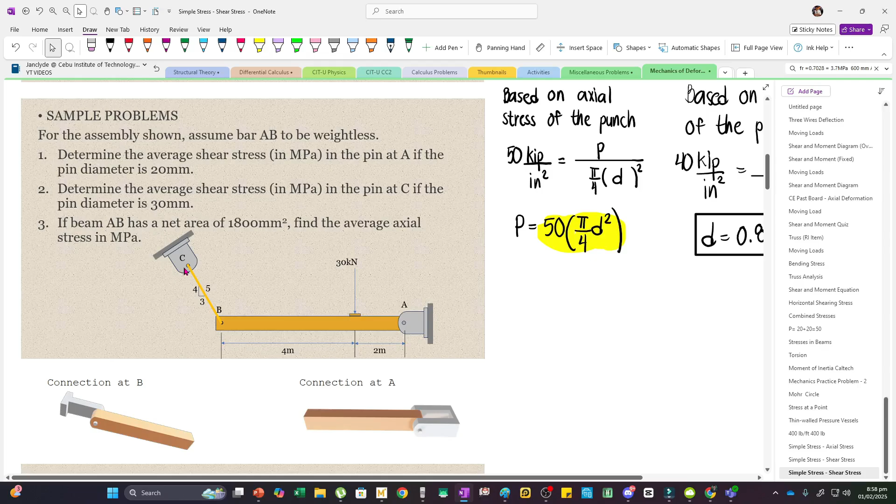Now ito yung connections natin. Merong pin at A saka pin at C. But hindi pa natin alam if single shear or double shear. Buti na lang, binigay yung section view ng connection at A saka connection at B. So now, solve muna natin yung reactions.

By the way, itong problems na to, meron tong choices. Tapos yung choices, medyo tricky. Merong mga trap na choices. So for example, dito sa number 1, tinanong yung shear stress ng pin at A. So naka-double shear. Now kapag hindi mo na-divide by 2, lumabas din siya sa choices. So kaya you have to be careful of that.

So again, let's make a cutting plane dito. So maglalabasan yung tensile force ng BC. And then sa point A naman, meron tayong dalawang reactions. This is AY and then this is AX.

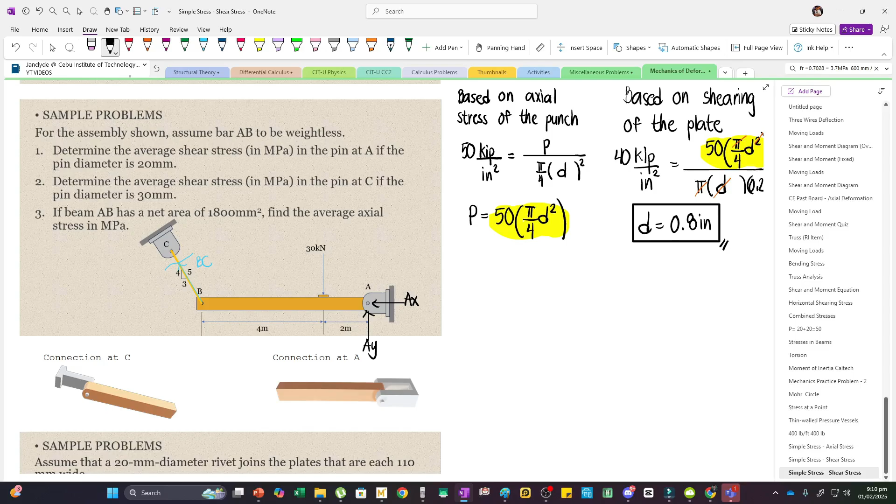Ayan. So itong BC, meron siyang components, horizontal and vertical components. So ito yung BC, BCX, which is essentially BC times the horizontal distance divided by the hypotenuse. Ayan, to the left. And then meron din siyang upward na component. So this is BC multiplied by the vertical distance divided by the hypotenuse.

This is 5. So, depende na lang sa'yo ano yung preference mo kung saan ka magsisimula. Now, I will just take moments about point B equal to 0. So, ditong banda, yung force BC, it will be eliminated since wala siyang rotation na makukos about point B since ito yung originating point niya.

So, ito lang. Yung AY, magkukos siya ng counterclockwise rotation about point B. So, minus AY. And then, our moment arm is 4 plus 2. This is 6. Then, itong 30 kN load, it will cause a clockwise rotation about point B. So, plus pala. 30. And then, our moment arm is 4.

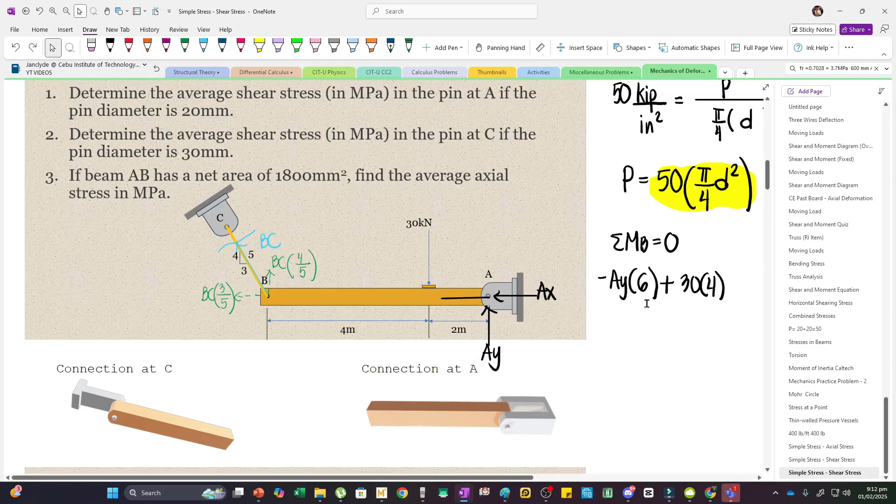Tapos, yung AX, line of action niya, tatama sa point B. So, wala siyang rotation na makukos. Wala kasi siyang moment arm. So, equate mo na lang yan agad to 0. And then, we can solve AY. So, negative 6AY, then plus 30 times 4 equals 0. Ayan. AY pala is 20.

Ayan. Now, since meron na tayong AY, we can sum up forces vertical. Summing up forces vertical, we have BC times 4 over 5, then minus 30 going downward, tapos plus AY, which is again 20. Equate to 0. BC is equal to 30 minus 20, multiplied by 5 over 4. I mean, this whole expression pala. Ayan. So, BC equals 12.5 tension.

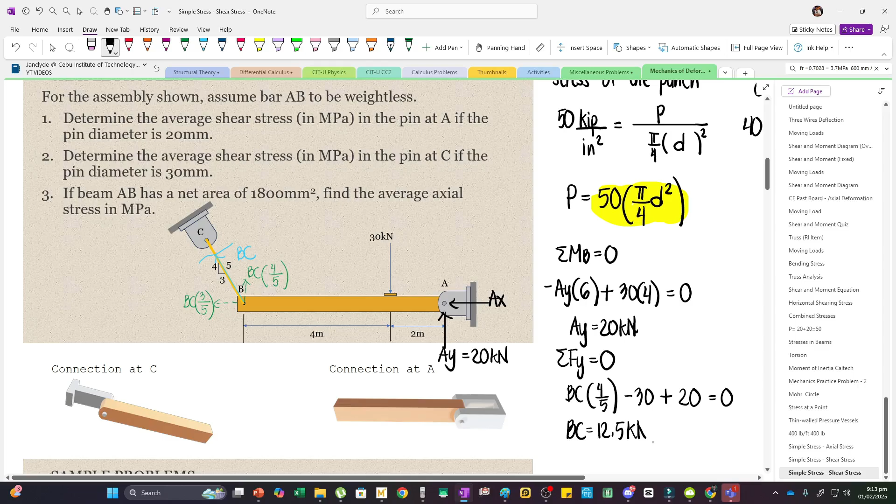And then, naka-kN yan. Now, finally, we can sum up forces along X para makuha natin yung AX. Now, our BC is going to the left. So, alam na natin yan, 12.5 yung BC multiplied by 3 over 5. Tapos, yung AX, yung inassume natin, going to the left. So, minus AX equals 0. Ito rin pala, minus, since going to the left.

So, solving AX, this would be negative 12.5 times 3 over 5. So, negative 7.5 kilonewtons. So, ibig sabihin pala, yung AX is going to the right.

Importante kasi yung direction para sa number 3. So, clarify ko lang, hindi ibig sabihin na negative yan going to the left. Yung ibig sabihin ng negative dyan is mali yung assumption natin initially. Yung inassume natin sa figure, going to the left, negative yung lumabas, so mali yung assumption. Kaya, going to the right siya. So, modify na lang natin yung arrow. Ayan. And then equals 7.5 kilonewtons.

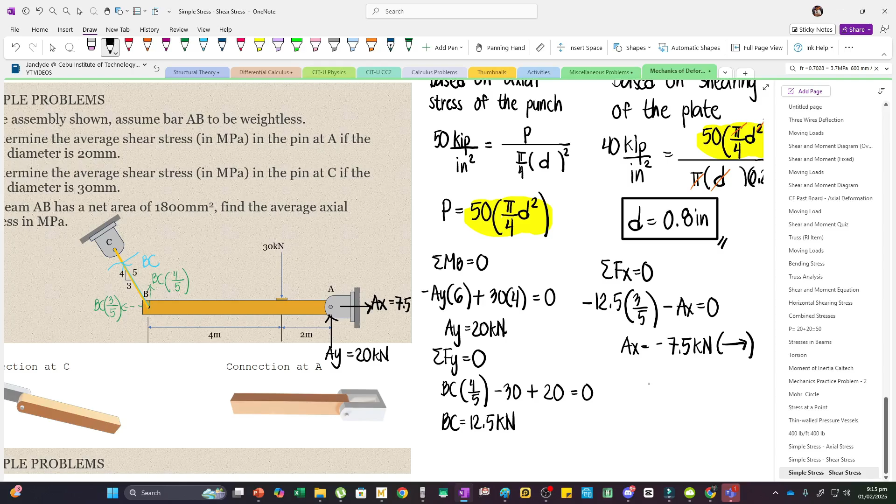So, dito muna tayo sa number 1. The shear stress in the pin at A. Again, itong connection at A, naka-double shear, since we can make 2 cutting planes sa bolt, dito saka dito, merong 2 cutting planes. So, yung maglalabasan na shear forces ng pin, dalawa rin.

Now, ano yung force na gagamitin? Diba, sa point A, merong AY, meron ding AX. Now, ito yung dapat mong tandaan. If you are calculating the shear stress of the pin, you have to use the resultant reaction. So, ibig sabihin pala, hindi lang AX, hindi lang AY, you have to use RA. Diba, meron tayong RA, essentially, going this way. Upward then to the right.

But RA is simply square root of AX squared plus AY squared. So, I believe, pwede natin yan i-input right away dito. So, square root of AX natin is 7.5, tapos square natin. Then, plus AY, 20, square din. So, ito na yung RA. And then, divided by the area, the diameter is 20 for the pin at A. So, pi over 4 multiplied by 20 squared.

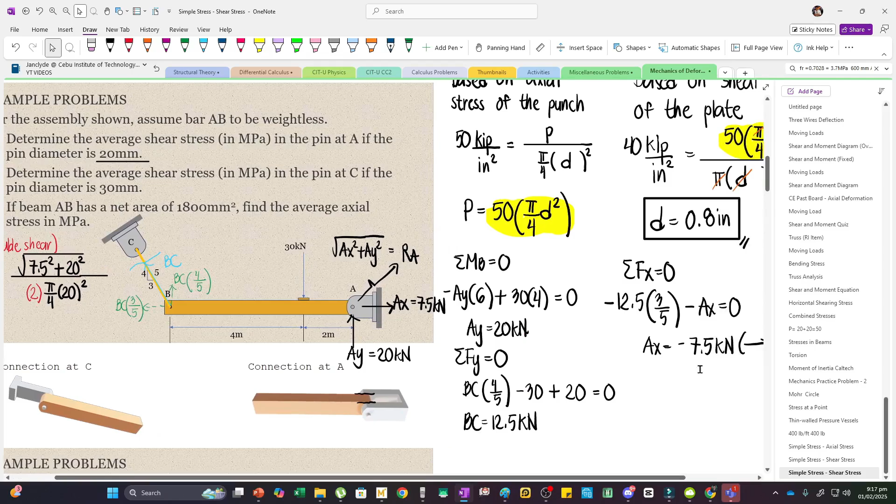But wag mong kalimutan na the connection at A is in double shear. So, multiply this by 2. Ayan. Double shear. So, solving the shear stress. By the way, yung 7.5 saka 20, naka-kilonewton pa yan. Diba? So, we still have to convert this into newtons. Multiply by 1,000. Ayan. Huwag mong kalimutan yan.

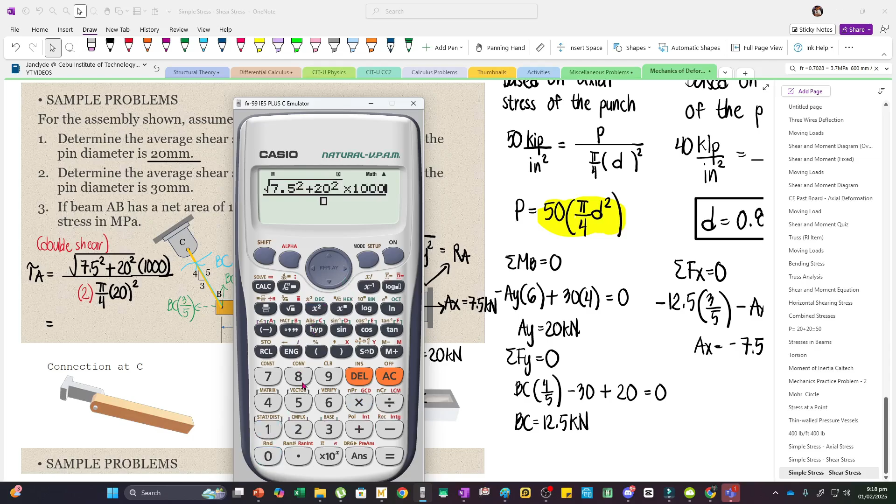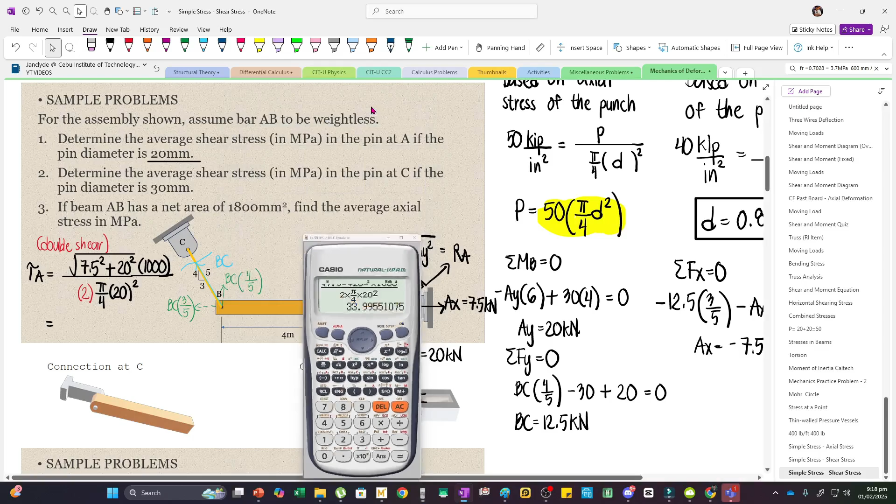In MPa kasi yung hinahanap. So, square root of 7.5 squared plus 20 squared times 1,000. Then, divided by 2 times pi over 4 multiplied by 20 squared. So, 33.99, or 34 na lang. 34 MPa. Now, sa actual choices, may lumabas na 68. Yung 68 lalabas if hindi mo na divide by 2. So, yan yung ibig kong sabihin sa mga trap na choices. Sige, so, tapos na tayo sa number 1.

Sa number 2 naman. Determine the average shear stress in the pin at C if the pin diameter is 30 mm. So, ito yung pin at C. Naka-single shear lang. Now, merong cable na nakakonect sa pin at C. Kung ano yung tension ng cable, yan din yung reaction at C, essentially. Now, alam na natin yung tension ng BC. This is 12.5. So, madali na lang yung shear at C.

So, our force is 12.5 kilonewtons. Multiply this by 1,000 para maging newton siya. Then, divide this by the area. Diameter is 30 mm. So, pi over 4 times 30 squared. Tapos, wag mo na i-multiply by 2, since single shear lang yan. Now, input natin 12.5 E3 divided by pi over 4 multiplied by 30 squared. So, 17.68 pala. And then, naka-MPa na yan.

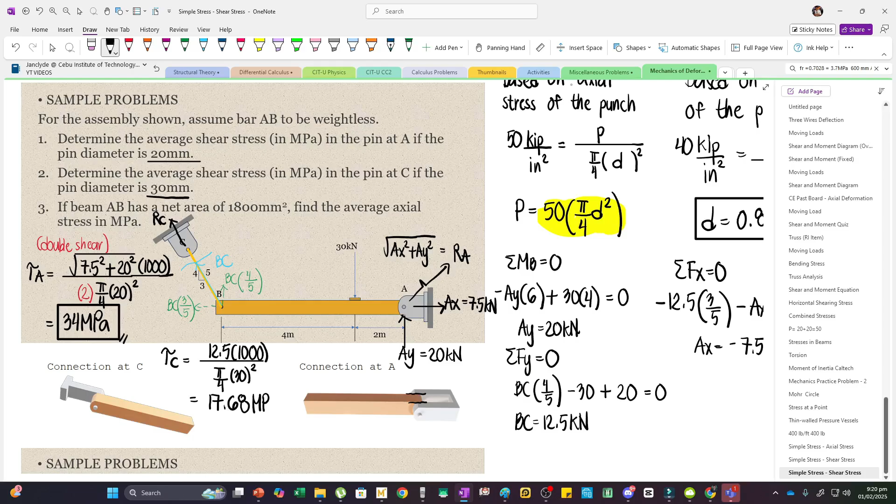Now, finally, we have to find the average axial stress experienced by beam AB. Meron daw siyang net area na 1,800 mm². Yung tanong dyan is, ano yung force na gagamitin? Diba, kapag axial stress, we are interested in the perpendicular area to the force. But we are referring to the cross-section. So, baka isipin nyo, ito yung beam AB, so yung AY, perpendicular. Hindi yan ganyan. Again, we are looking at the force which is perpendicular to the cross-section.

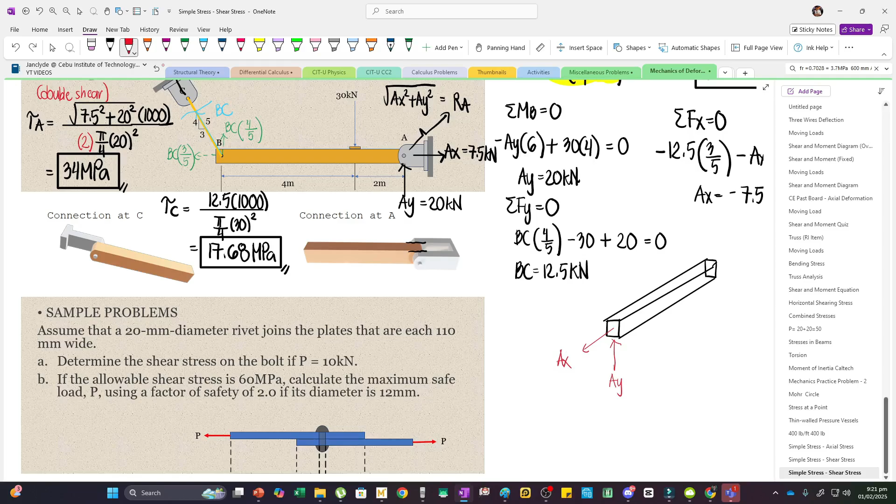Now, kapag naka 3D yung beam, parang ganito yung itsura niya. And then, sabihin natin, ito yung AX, and ito naman yung AY. Notice na itong AX, this is perpendicular to the cross-section of the beam. So, yung AX pala yung gagamitin para sa average axial stress. Hindi yung AY. Again, cross-section yung titingnan natin, hindi yung length.

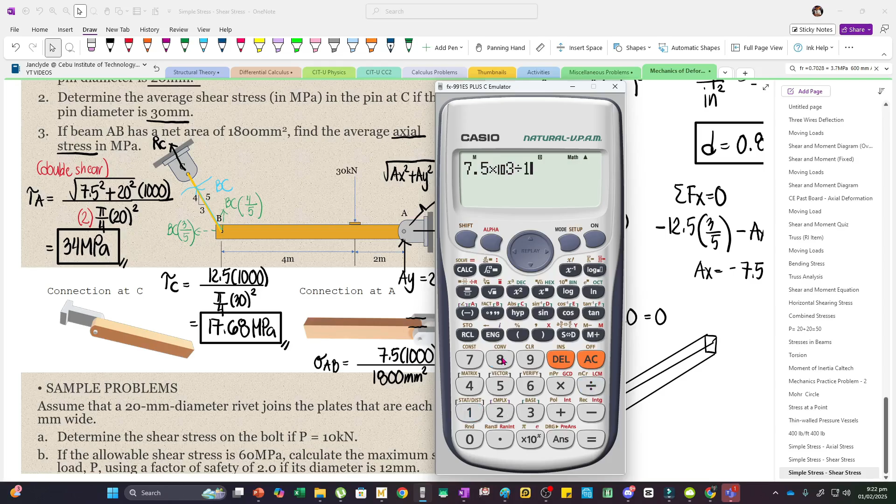So, for the last question, we have sigma AB. This is equal to the axial force, 7.5 kilonewtons. Multiply this by 1,000 para maging newton siya. Then our area is 1,800 mm². So this would be 7.5 E3 divided by 1,800. So magiging 4.17 MPa. Now, itong force na to, this is acting away from beam AB, acting away from the cross-section. So, ibig sabihin pala, this is tensile.

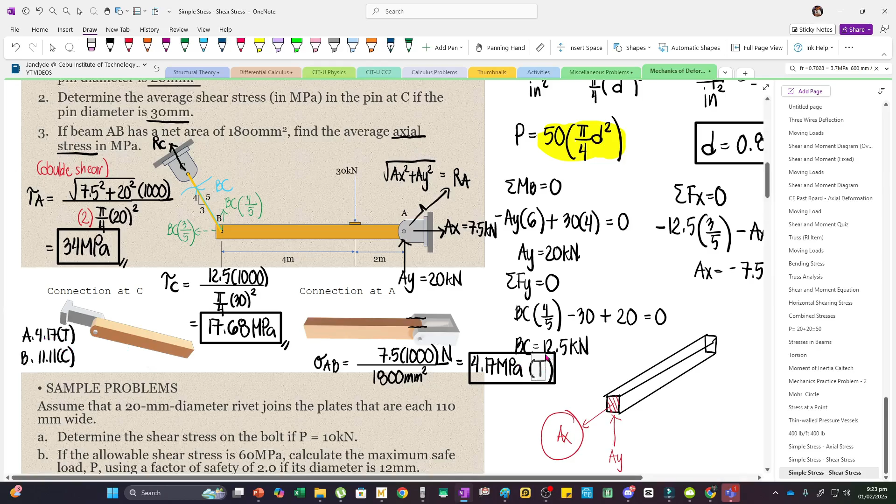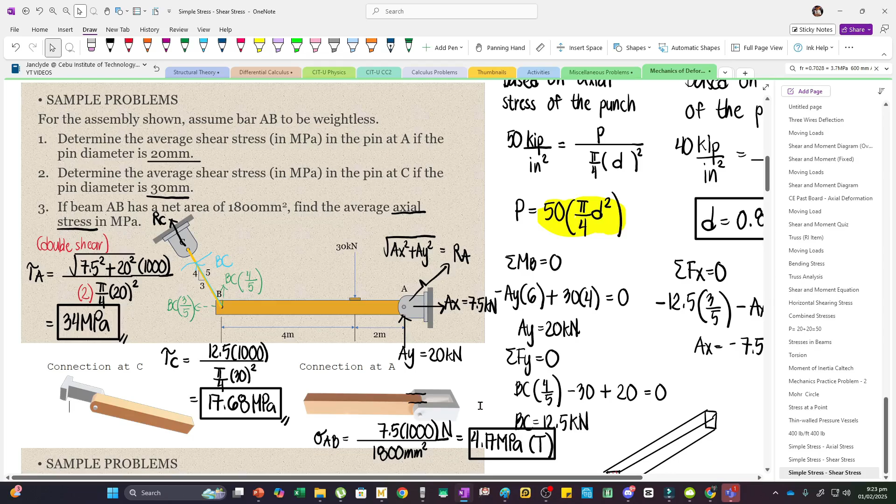Tensile stress. Yung nasa choices kasi is ganito. Letter A, 4.17 tension. Tapos letter B, 11.11 compression. So, kailangan alam mo yung indication niya, whether tension or compression. So, recap lang natin, kapag meron kang connections na ganito, always check kapag naka-double shear or single shear lang. And then, for the axial stress, always look at the force perpendicular to the cross-section.